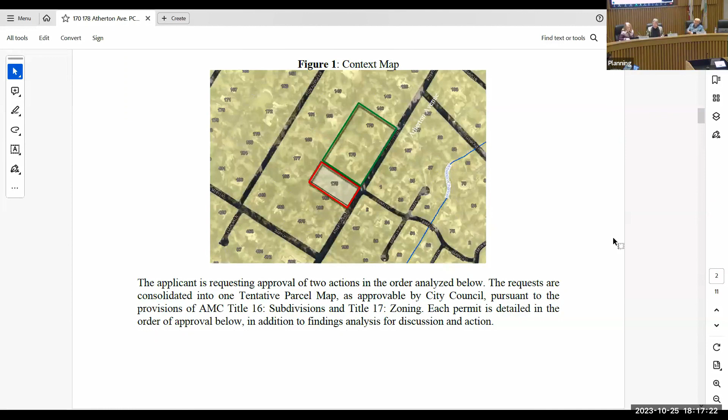Yes, okay good. I'm sharing my screen to go into the staff report. Thank you, Commissioner. This is 178 Atherton Avenue.

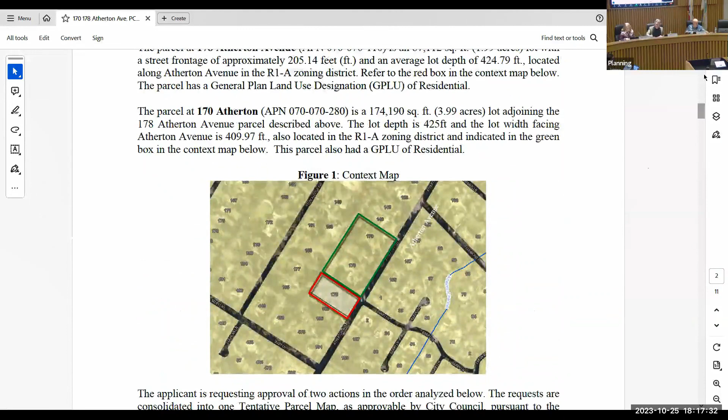The request is for a lot subdivision, a 3-lot subdivision, on the parcels owned by Green Acre Gardens LLC. I want to jump into the location and context map.

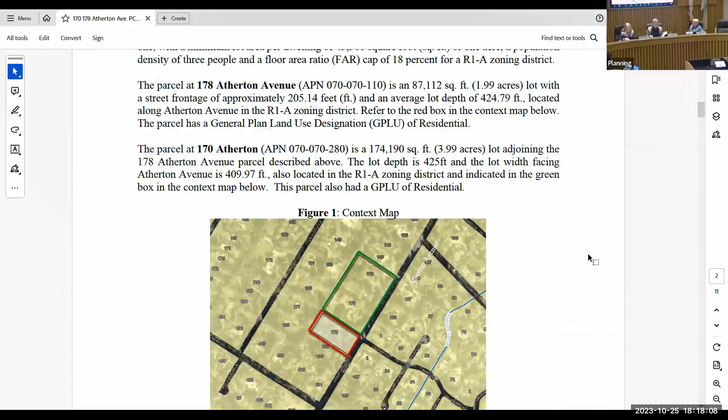Let me reduce the screen so you can see it. What you see in green is 170 Atherton Avenue, a 3.99 acre lot. What is shown in red is a 1.99 acre lot on 178 Atherton Avenue.

The request from the applicant to the commission tonight is for two actions: approval of a lot line adjustment and a subdivision, both consolidated into one tentative parcel map. This is approved by the council, but the recommended action comes from the Planning Commission. The second request is a lot line redesignation of the newly proposed flag lot.

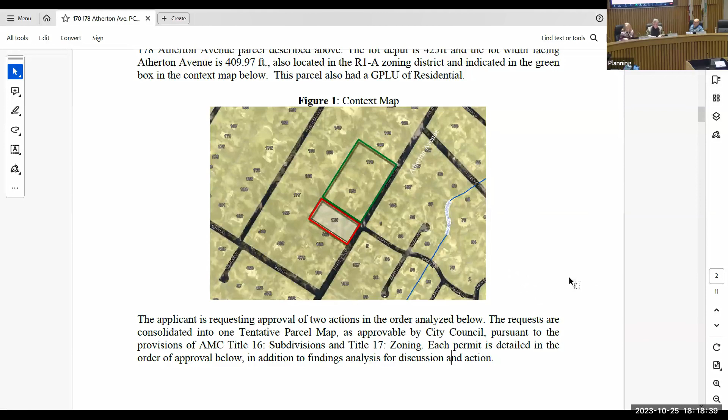Traditionally, a lot line adjustment is a staff level approval. However, with this particular project, we have combined and consolidated the request into one tentative parcel map. What you see in front of you on the screen are the three lots that are proposed.

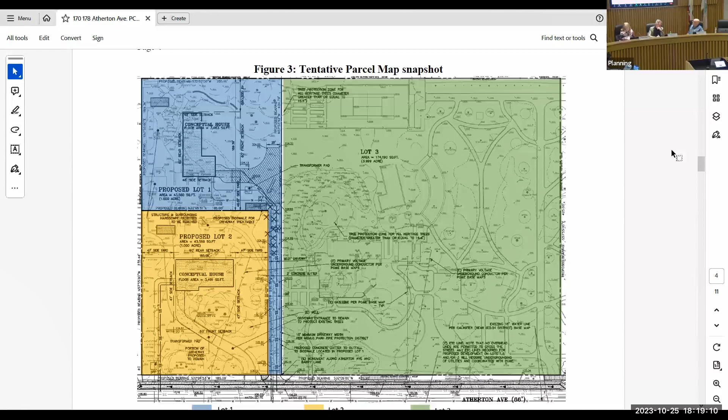The entire motion of this tentative map is to merge both parcels, because they're owned by the same owners, and then subdivide it into the blue flag lot which is lot 1, the yellow which is lot 2, and lot 3 remains the same.

Lot 1 and lot 2 are proposed to be exactly 1 acre lots, the minimum required by the subdivision ordinance. Lot 3 is meeting all qualifications of the 1 acre lot for sites that are sloped under 20%.

The subdivision and the tentative map has gone back and forth a couple of times between staff and the Public Works Director, asking for will-serve letters, the standard requirements for all lots that need to be serviced in an urban area. We are recommending that the Planning Commission approve these lots as shown.

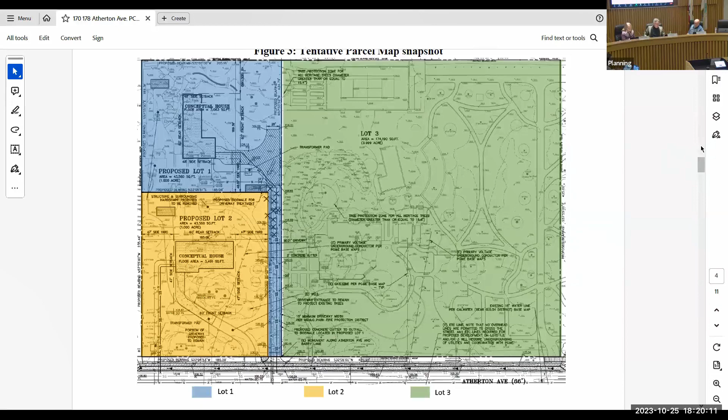The second action for the subdivision, in this particular case, comes from the fact that lot 1 and lot 2, as shown, are read per the ordinance. The way lot fronts are reviewed is as shown in the exhibit in front of you.

For the flag lot, the definition of lot front is what you see in the red line. If lot number 1 is designated to have this as a lot front, it doesn't meet the minimum required dimensions of lot depth and lot width for the R1A zoning standard.

In order for that conformance to happen, the applicant is not seeking any variances of any kind. They are requesting that this front be redesignated to the purple line. The redesignation of the front and rear basically changes the way the house is oriented, as you can see in the blue flag lot.

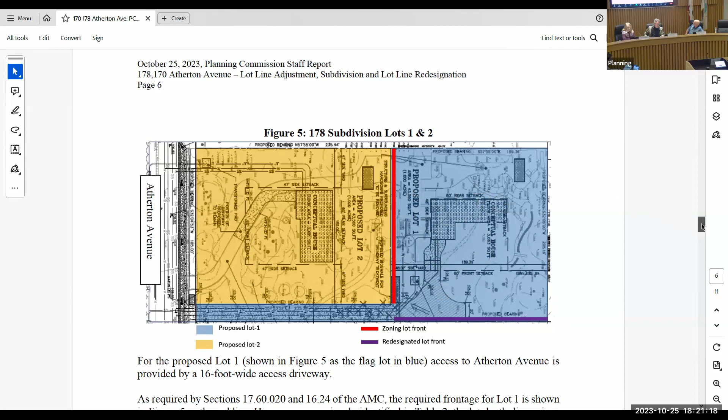The requirement of both the subdivision and the lot line redesignation is based on a certain set of findings. Subdivision findings are elaborate — we have to make sure the subdivision conforms with general law and chapters 16 and 17, and that the size and shape of the proposed lot conform with the general pattern of the neighborhood, without causing traffic, health, or safety hazards.

Generally speaking, with urban infill lots, the subdivisions are reviewed in the block and neighborhood type. We can see that 3 of the parcels in this block between Austin and Selby have flag lots, and this new flag lot that they're creating will add to that mix. The proposed lot needs to have sufficient access to the public street.

The flag lot shown in blue has the 16-foot drive going all the way. The project has been conditioned to receive Menlo Park approvals before they get into the final map and before the council, so we can make sure access to the public street is approved by Menlo Park Fire.

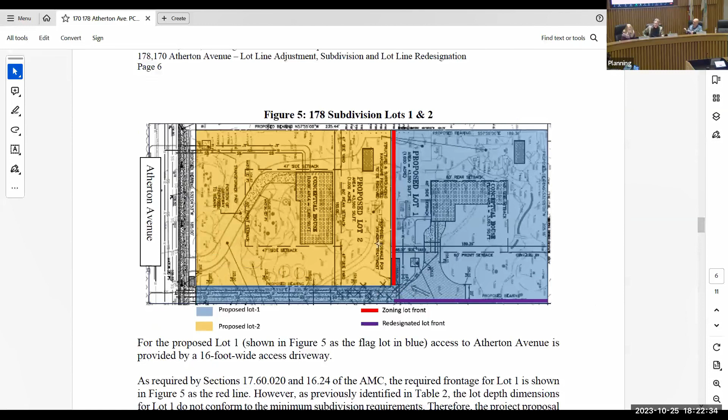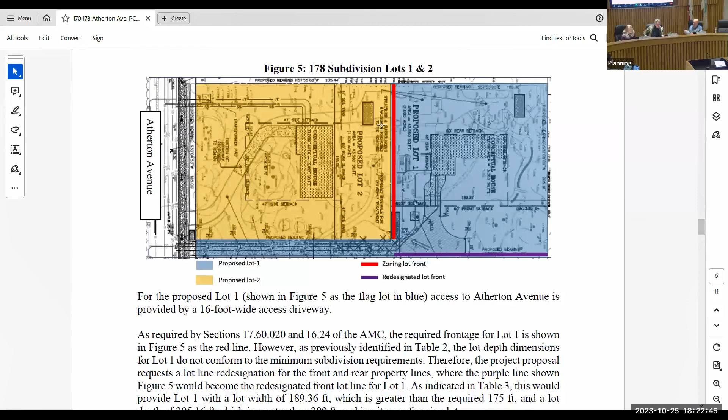The lot shown in yellow directly fronts Atherton Avenue, and they are retaining most of the existing driveway that's currently there, so it has sufficient access to the public street.

The proposed map and design are to be consistent with the general and specific plans. We made findings in Atherton's general plan that it is in conformance with the proposed subdivision. The site is suitable for this type of development — a standard Atherton R1A development for a single family residence.

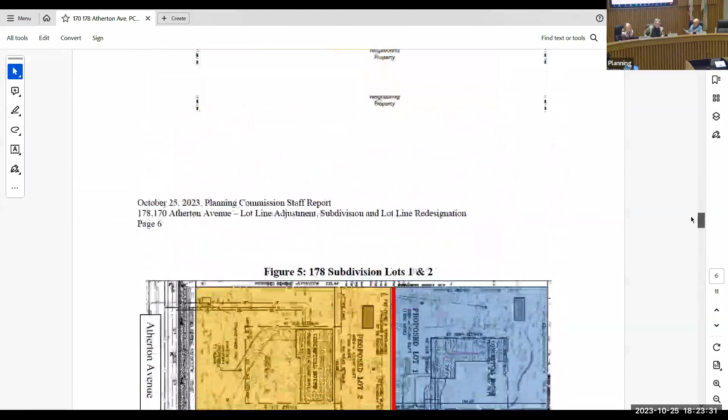The only two lots proposed to be developed at this point are the flag lot and the one in the front, which are the resultant of the 178 subdivision. These are the only lots proposed to be developed. The larger 4-acre lot is not being touched at this point.

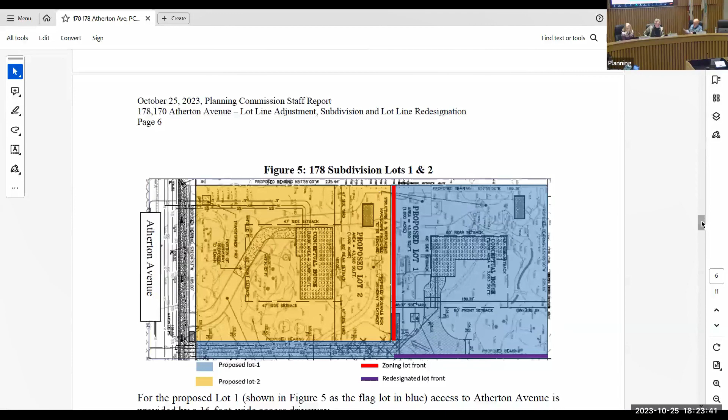Having said that, the conformance of the lots and the findings would be physically suitable for the type of development, because R1A requires certain lengths and widths, and they conform to those depths, and they conform to the density and zoning provisions.

This project is required to follow all R1A standards as a condition of approval. At this point, we are just reviewing the map. We are not reviewing any development at all.

Whether the site is physically suited for the proposed development relates to length, breadth, and depth, but CEQA as an exemption category requires sites to be under a certain percentage in terms of slope, and this is reflective of what our subdivision ordinance says too.

The design of the subdivision is not going to cause substantial environmental damage. We are seeking categorical exemptions for lots that are 4 lots and under, under CEQA, and I will speak about it in the later half of the report.

There are other findings related to public health, regarding whether the design of the subdivision is likely to cause problems. Our ordinance has specifications covering the requirement for lots in Atherton, reviewed under the general plan and CEQA, so we can make findings that it would not be a serious public health problem.

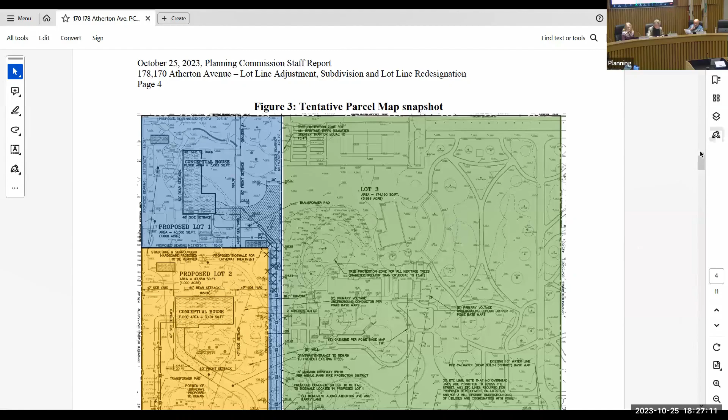There is not much impact to the surroundings for now. The first finding for the redesignation is to ensure it doesn't impact the vicinity, and is not detrimental to vehicles, people, goods, or the subject property in and around. The way the flag lot is designed right now has very minimal impact on its neighbors, since the reorientation doesn't make a big impact on movement of goods, and it has dedicated access and dedicated right of way to get to that point.

We also need to make findings that the proposed redesignation is in accordance with the general plan and its purposes. One of the housing goals in our general plan is to facilitate private development of housing to meet a portion of the above-moderate income requirement identified in Atherton. This is one example where it meets that goal, and similarly another policy also meets that goal.

So staff is recommending that the redesignation be supported by the Planning Commission for council to approve. We noticed this as a standard notice on all public hearing projects, with a 500 foot radius, and so far we haven't received any public comment on this particular subdivision.

This is what I was talking about for a categorical exemption for CEQA. We will be filing with the OPR a notice of exemption for minor land divisions, and you can see that it is very specific to urbanized areas for residential, 4 or fewer parcels, and the fact that it has not been subdivided in the past 2 years, and it has an average slope of less than 20%. The slope on this entire 6-acre parcel is 1.3%. So it's specifically for flat kind of land, I think.

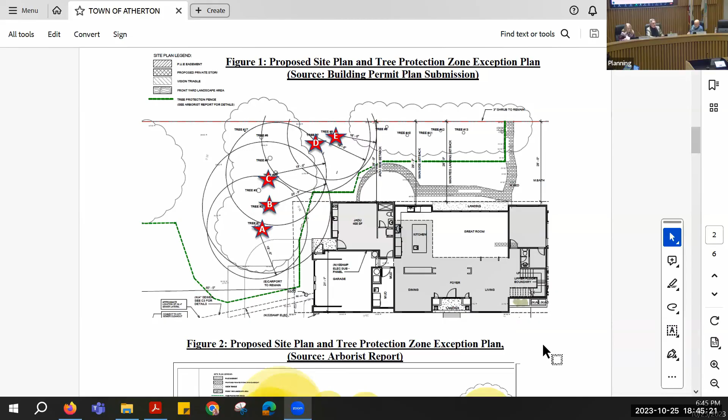All right, very good. So I'll go ahead and open up the public comment section and we'll have the applicant come up. There you go. Thank you for waiting. You go ahead. Good evening.

Good evening, my name is Wenli Wen. My husband Kevin Wen and I are both owners of 97 Holbrook Lane. In the narrative we submitted, we mentioned that our family places great importance on living together and building cherished memories that will last a lifetime. In order to do so, the approval of the TPZ exception holds immense significance in our lives.

This exception is tied to the potential creation of this junior ADU on our property, and I would like to take a moment to explain why this is so vital to us. The approval of the TPZ exception is a crucial step in ensuring the well-being and quality of life of our beloved family member, which is my father-in-law, Kevin's dad.

A few years ago, he experienced a stroke, which has significantly impacted his daily life and mobility. As a family, we have rallied around him, striving to provide the care and support he needs to lead a fulfilling life. We believe that the addition of a junior ADU is not just a luxury, but a necessity for his well-being.